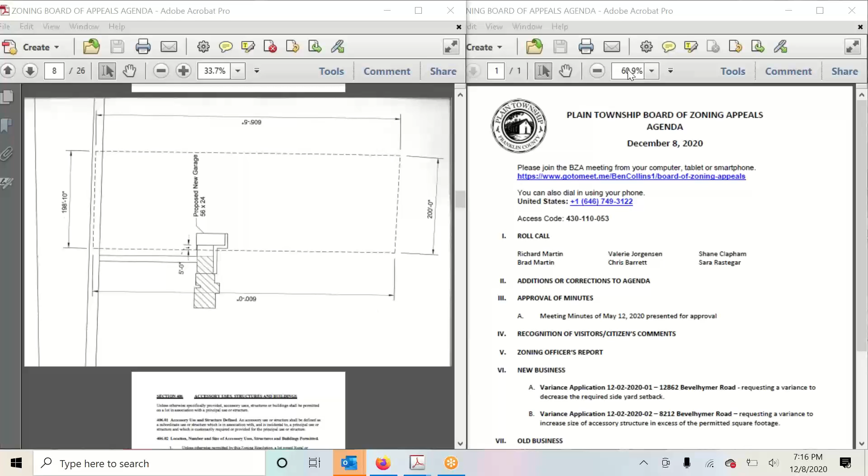So in the long term, this won't matter at all, but for now it does. So I just want to make sure we're flying by the letter of the law. Right, and even though both parcels are owned by the same property owner, under the language in our zoning resolution text, a variance would be required for this. So we appreciate you going through the measures.

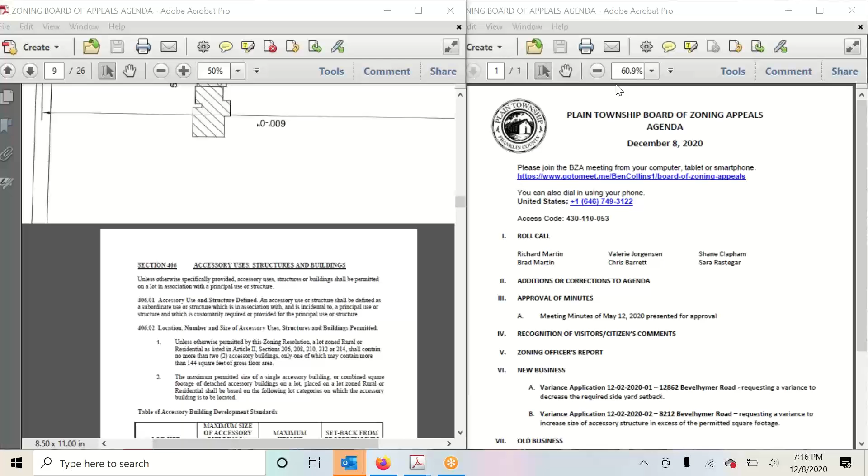Yep, for sure. I happen to be a member of the zoning board myself, so I know the importance of these kinds of things. Just for reference, good, thanks Greg.

The applicable section is 406.02, and we see that for properties over 2 acres, a setback of 15 feet is required for accessory structures. So that's the specific item he's seeking a variance from. Okay, good.

Does anybody have any questions or comments they would like to present to Greg or me? I'll also note that Chris Barrett is my neighbor on my other side, so he can beat me up on this too.

I try not to claim that, but knowing the property from just seeing it next door, the structure is going to be the furthest away from the neighbor on the adjacent side. So they haven't had any issue, and knowing them as well, I've communicated with them. So I don't have any questions and don't see any issues with this request.

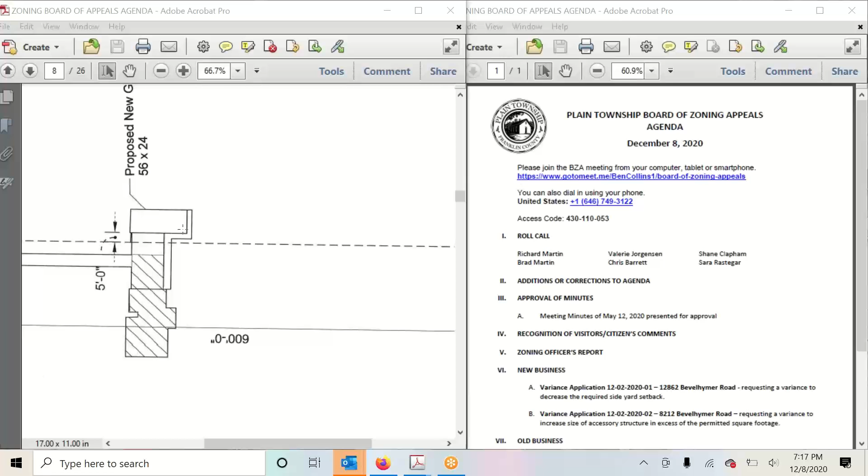Okay. Well, with all that said, and all the paperwork seems to be up to date and correct, do I hear a motion to approve this variance for the next meeting?

Let's see, when is it? January 12th.

This is Shane, I will make a motion to approve the variance. Seems pretty straightforward. All right, thank you, Shane.

Do I hear a second? This is Brad, I'll second that. All right, thank you.

Mary, you want to run the roll to do an approval? Sure. Richard Martin, yes. Shane Clapham, yes. Chris Barrett, yes. And Brad Martin, yes.

Okay, thank you. The variance has been approved for the next meeting. Thank you very much.

Thank you, Greg. Yep, you can stay if you like. I was just saying, anything else needed from me? If not, I'll drop off and tend to the kids. Sounds good, we'll see you next month. All right, thank you, thanks all, thank you Greg. Okay.

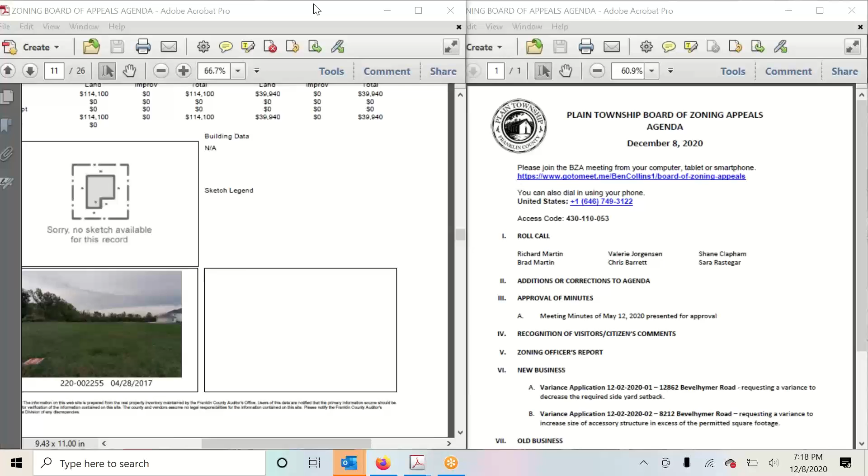The next item is another variance at 8212 Bevelhymer Road. This is to increase size of accessory structure in excess of the permitted footage.

Ben, any comments? Mary, do you want to provide a review of this one? I don't know what that static is. But... Okay, I think it's clear.

Ben, do you have any comments on this variance? So, Mr. Chair, this application is for a very similar variant. This application, also on Bevelhymer Road, around towards Walnut Street near the park, is requesting a variance for an accessory structure that exceeds the maximum square footage. So this is also under 406.02.

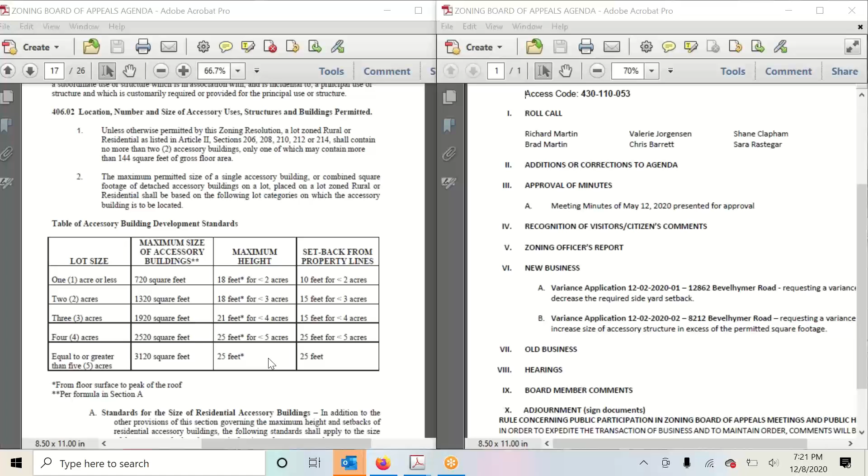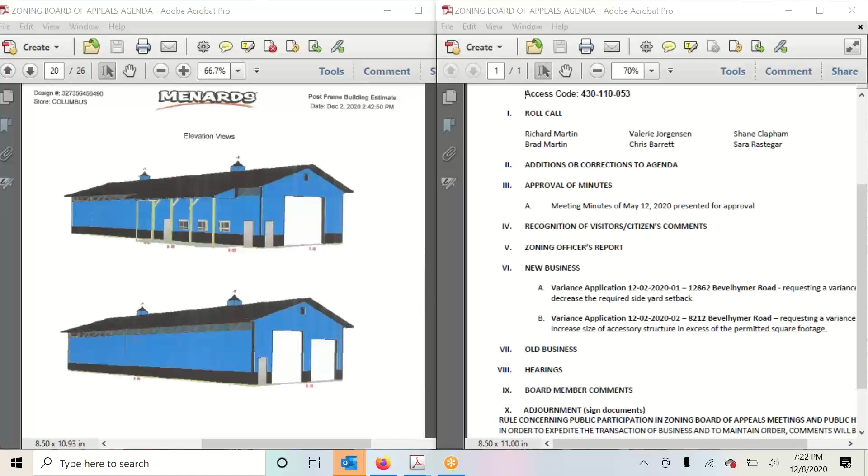And the required setback here is 25 feet because the property is over 5 acres total. Kind of a typical pole barn structure. They provided plans that they had obtained from Menards. Very rural agrarian typology with cupolas and a small porch, overhead doors on either end. No real concerns about the structure.

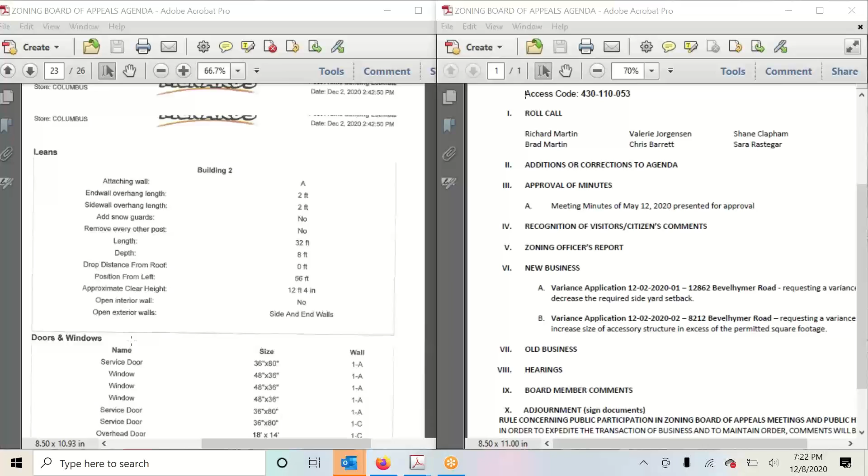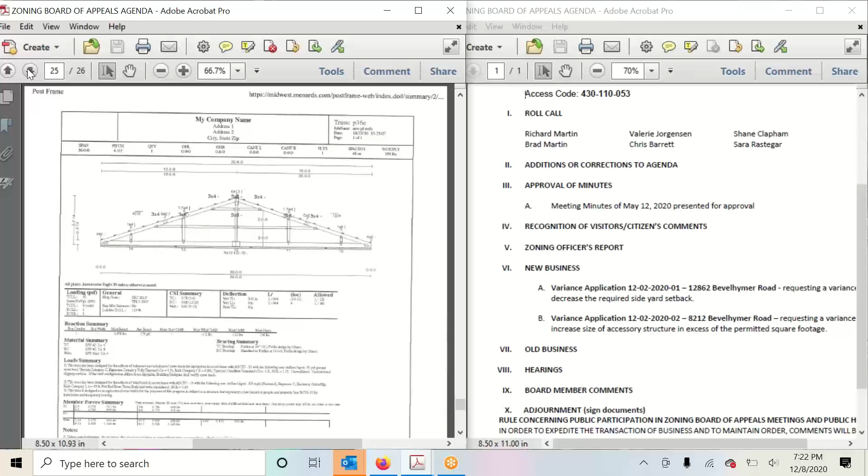Now, I will note that the application also requests that the setback be reduced from 25 feet. I would note that the adjacent property has an accessory structure that is 25 feet from the property line. So that would be a deviation from the adjoining property.

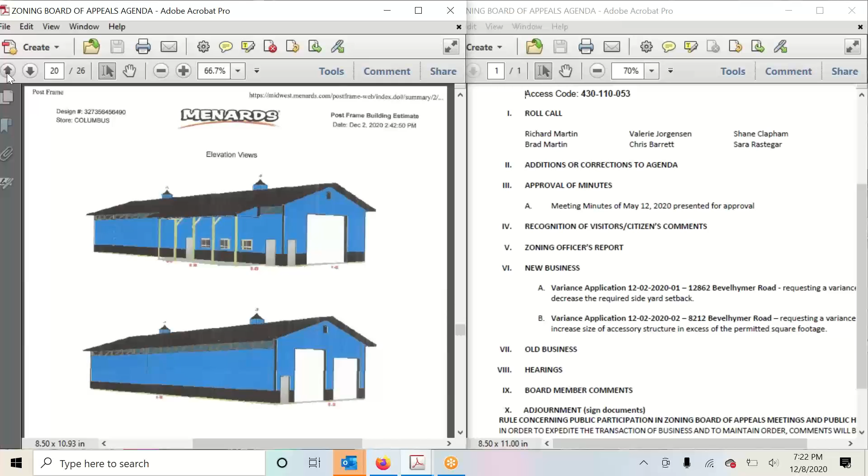Okay. Has he talked to the neighbor? Do you know? That I don't know. I believe the owner is on the call with us tonight, and he could address that. Yeah, I'm here. I've talked to my neighbor on multiple occasions about setting up a storage building. Back where it's built is where we plan to put it is also a storage building on his side. They would basically run parallel with each other.

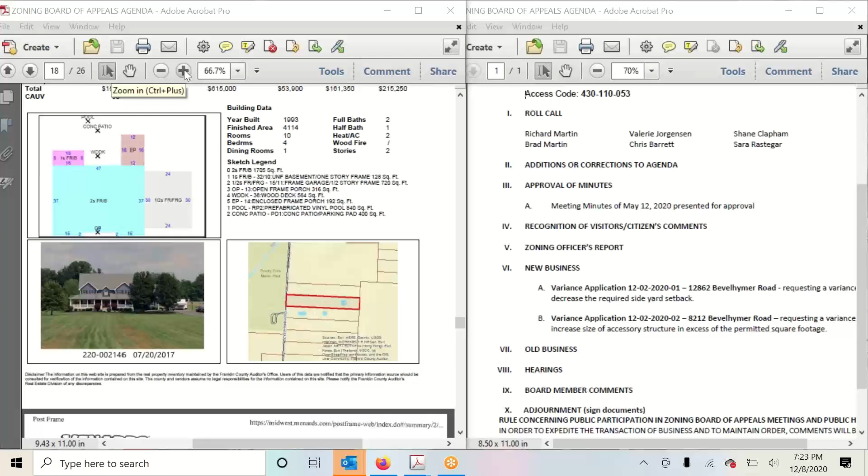It might even be hard, given viewing capabilities from the road, to even see them as you pass the home. Part of the request for the 25-foot setback is also that I've got my pool back there, and that porch area would be integrated with the pool area in order to obtain the necessary storage space for personal items, as well as create additional space for the pool, like a changing area and things of that nature. Okay.

Any other questions from anybody on the board? Concerns? I don't, and again, this is a stone's throw away from me, so I'm well aware of the layout of those houses and structures. But my only drawback would be if the neighbor has a concern, but it sounds like that's likely not the case. So I would be good with this one as well. Yeah, that was my thought also, that it looks like it would be a pretty good addition to the township. But if that neighbor had a problem with it, it might be a problem.

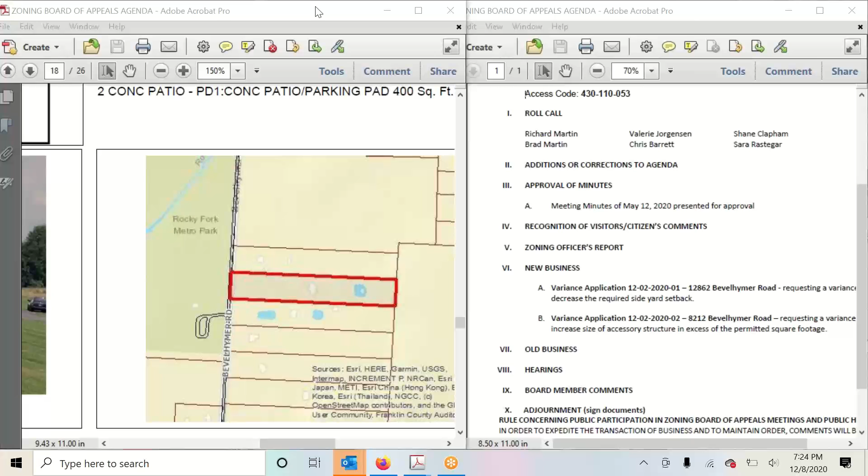And you said all the paperwork and everything's okay, ready to go for the application? Ben, you're on mute. Scrolling through the materials, I don't see a plot plan, but I'll check with Mary to make sure we have that before the hearing. Okay.

Well, if you do that, do I hear a motion to approve 8212 Bevelhymer Road for approval for our next meeting, January 12th? This is Chris. I motion to approve this. Hi, Chris. Thank you. Hello, this is Shane. I'll second it. Thank you, Shane. Mary, let's go through the roll again. Richard Martin, Yes. Shane Clapham, Yes. Chris Barrett, Yes. Brad Martin, Yes. Okay, thank you. It's been approved.

Thank you all very much. I'll go ahead and back out also. Okay, thanks, Mr. Conley. We'll see you next month. Okay, thank you, see you next month. All righty, bye-bye. Bye-bye. Okay, I think that about does her.

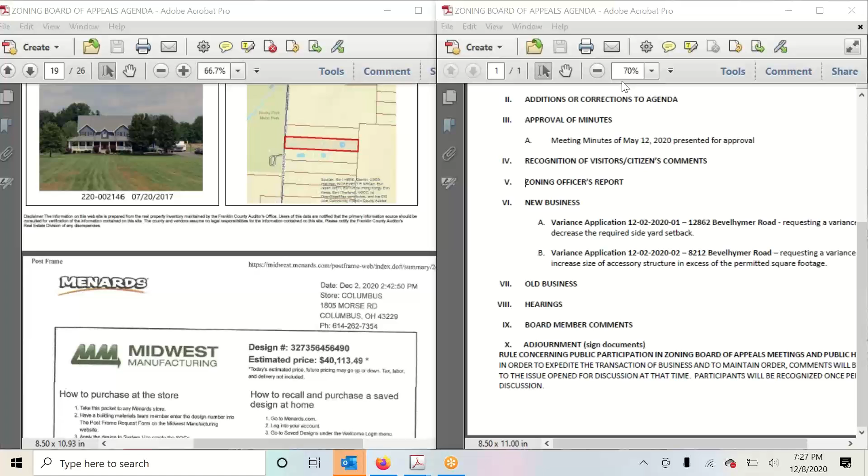Sounds good to me. Do I hear a second? All in favor, say aye. Aye. All right, see you all next month. Thanks, everybody. Thanks, everyone. Take care, everyone. Take care. Thanks, everybody. Thanks, Ben. Happy New Year. We'll see you. You too. See you guys. See you. Bye. Thank you, Mary.